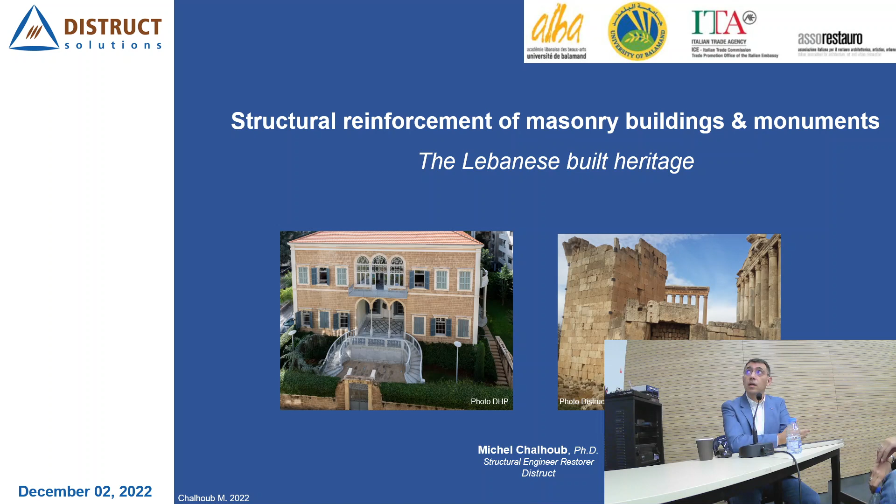As we all know, with more than 5,000 years of history, Lebanon is very rich in terms of built heritage, and most of this heritage is made up of masonry. So there is a need to retrofit, to reinforce, to maintain, and to restore this built heritage. In fact, the subject of masonry is very wide, and I will focus on the Lebanese built heritage, especially the Beiruti houses, because it needs more time to cover the whole subject.

First, I will talk about the concept of structural restoring of built heritage. Then I will move to the milestones of structural retrofitting, and I will focus a bit on the structural analysis of built heritage. We will see some proposals for reinforcement, and I will talk finally about monitoring.

So I chose to talk about the medicine of built heritage strengthening. Why? Because every built heritage, every historic building, is very complex in terms of history, phasing of construction, building materials, techniques of construction, aging, and so on - heterogeneity of multiple parameters. So we really need to use protocols similar to those of doctors to deal with our built heritage. The issue is that our patient also needs some geriatric medicine.

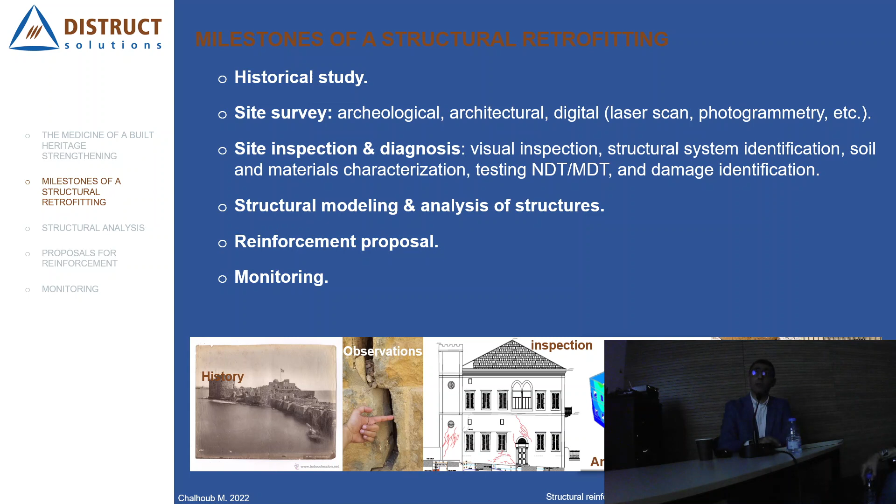This is a case study that we conducted on the Sidon Sea Castle, where we found some documents dating from 1871 and some of Kalayan.

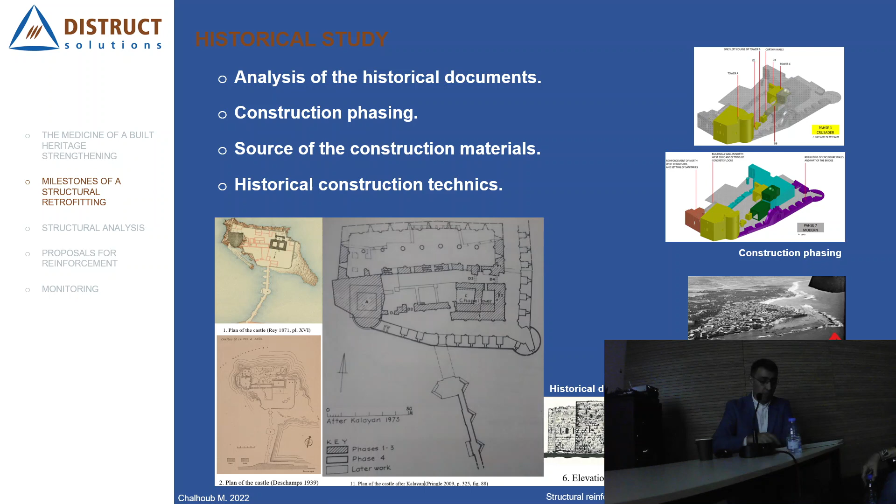We could prepare the construction phasing of this castle based on these documents. We also found that there is, for example, a sandstone quarry not far from the castle used to produce the sandstone materials.

Here we move to the site survey, and I'm showing two principal tools, which are photogrammetry and laser scan. I chose these two, in addition to archaeological survey and traditional architecture survey, because these two tools are very useful in monitoring.

We can compare the actual state of the building or monument, and after 2 years we will come back and do the same, comparing if there are modifications in terms of displacement or movement in this monument.

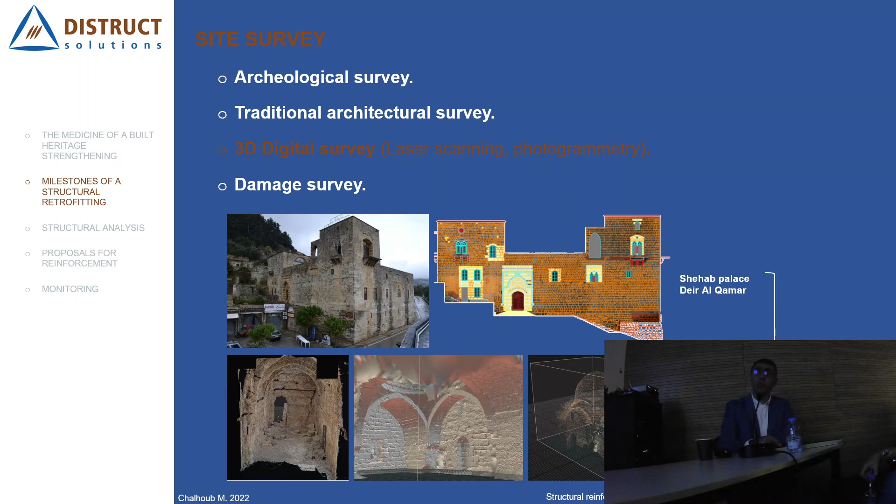Here I move to the site survey, and first of all we have to make a damage mapping. It means we have to put on paper, on photos, the cracks and the decays, based on some principles provided by ICOMOS or UNESCO.

We move now to the inspection and diagnosis. First we will start with the foundations. In fact, the system of foundation of Beiruti houses especially is like a foundation wall or arches, as shown in the photo to the bottom right.

In addition to the soil investigation that we all know for contemporary buildings, we have to do some pits to discover the typology of the foundation and if there is any crack, like for example the photo to the bottom left.

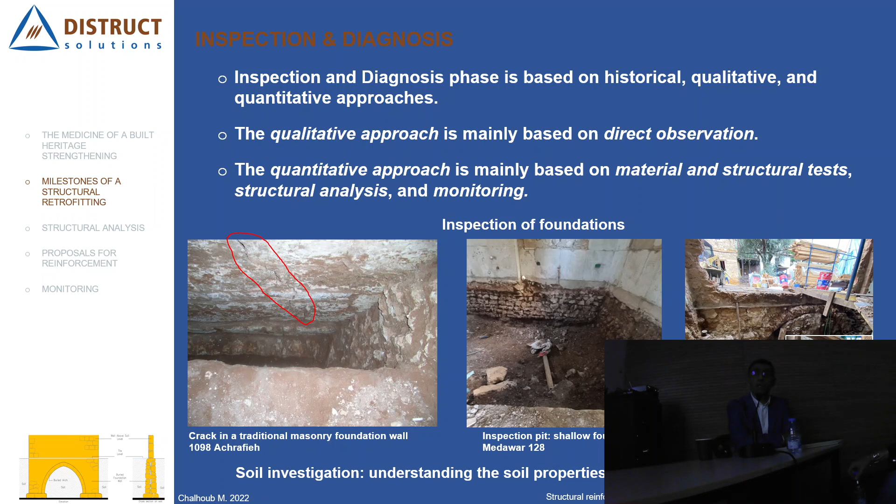In some cases, like here, it's an ongoing project, we discovered that there is heterogeneity in terms of depth of foundations and typology of foundations. So this is something that makes it a bit difficult to treat built heritage, unlike contemporary buildings.

We move, for example, to the inspection, with examples from Beiruti houses or historic buildings. We did some inspection on the walls to see about the texture, and we discovered, for example, rubble walls from the inside, meaning very poor mechanical properties for the bearing walls.

Here to the right, the system of slabs, like a wooden slab and the planks. We need to check every single detail, because the connection between walls and slabs is really weak in the built heritage of Beirut.

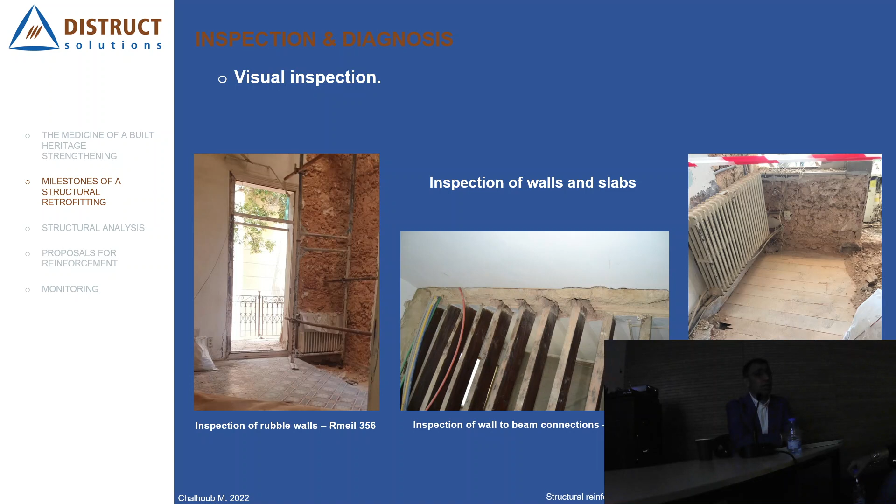Here we move to another example, a church, a very well known church in north of Lebanon, where we can see by our eyes a very big crack on the elevations, like in the bottom to the right. We can also see a settlement of the pier and a sliding of the soil. All of these parameters give us a clear vision about what is happening in this monument or building.

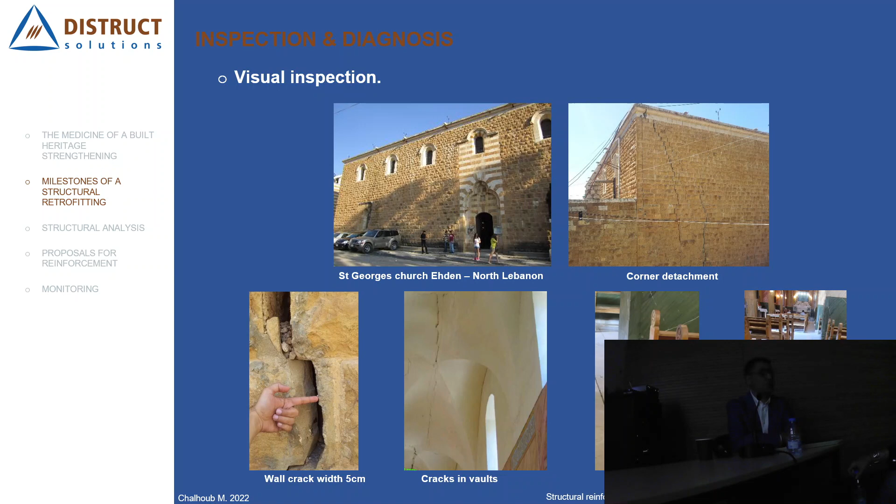So we can build on this to move to other steps, like testing NDTs or MDTs. NDTs mean non-destructive testing or non-invasive testing, or minor destructive testing. I will move now to the second step of inspection and diagnosis, which is the testing.

I will focus a bit on some useful testing for seismic calculation or retrofitting in built heritage. We all know the georadar and the boroscopy, but we will focus on the sonic and dynamic tests, and also present the double flatjack test, which is very useful in masonry structures.

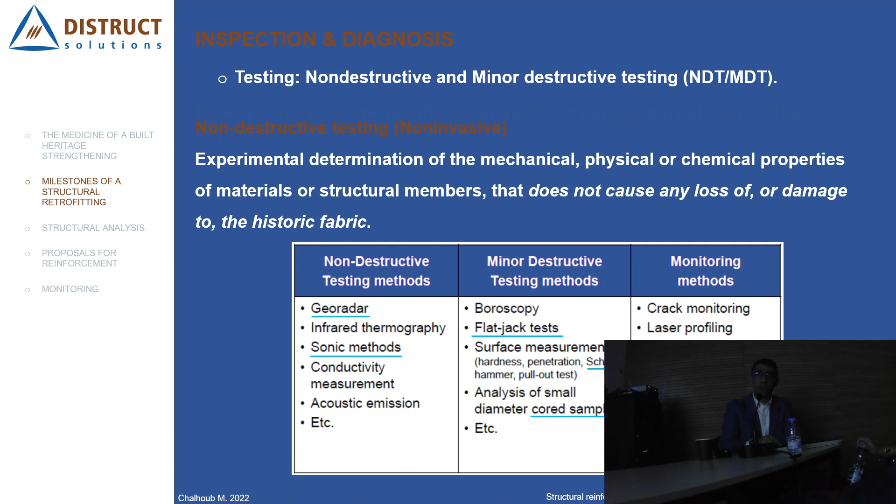Here's an example of dynamic identification, the experimental dynamic identification. I know many engineers make modal analysis on numerical commercial software. But to do it right, we have to check if our numerical or digital model is really representative. For this reason, we have to make what we call the experimental dynamic identification. It means knowing how our building is vibrating under normal or forced vibration.

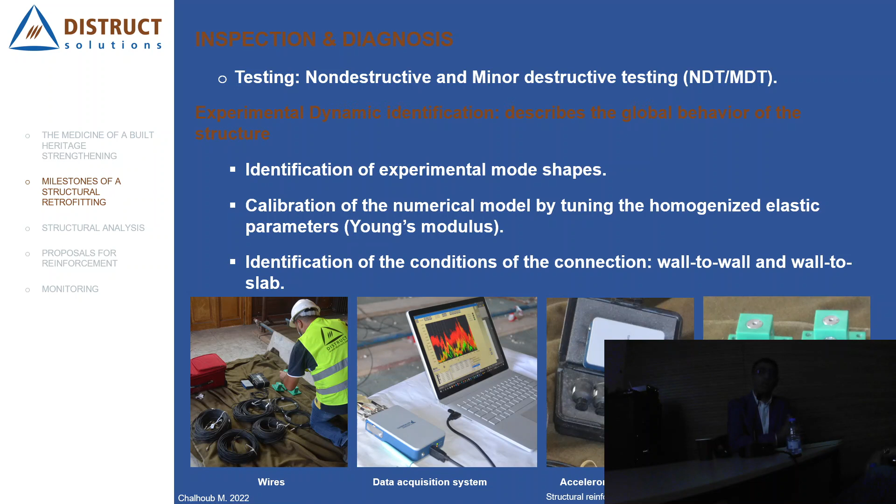Here we can see the tools needed: some wires, a data acquisition system, and the accelerometers. They are the key of the dynamic testing, along with some connectors. I will show you some testing we have done here in Beirut.

We can see the signal, and to the bottom left, the numerical model. It is a nonlinear numerical model, but for the modal analysis we are in the elastic phase. We can see the mode shape, meaning how the walls are moving according to an earthquake. To the right is the experimental output, a post-processing that demonstrates the mode shapes are similar between experimental and numerical.

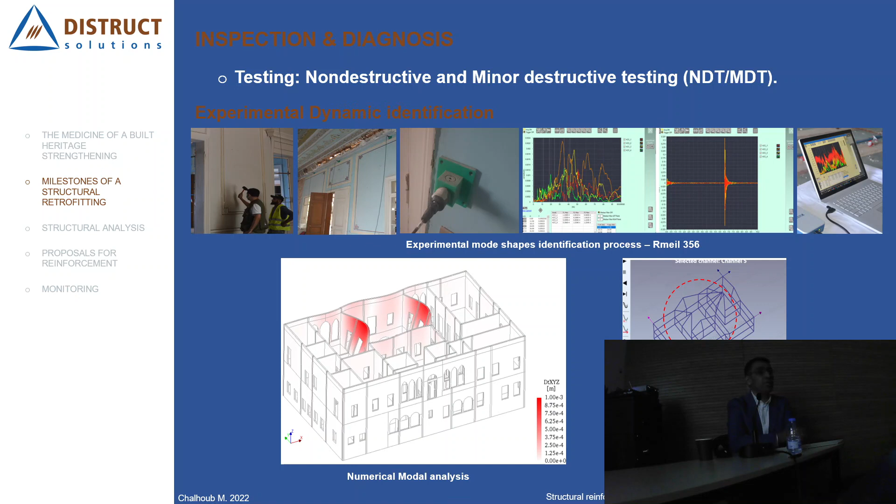We need this also to calibrate our numerical model. It means making sense of our numerical model to get good results.

Now I will move to the sonic or ultrasonic test. We need this to know about the quality of our walls. The same system as the dynamic testing is used here, but we add a hammer that we can see in the middle left. To the right we can notice an output for the sonic or ultrasonic testing.

The one in the middle shows a variation in colors, meaning that inside our wall we have some voids, and the one to the right is homogeneous after injection. We can see the injection process. So this is a good tool to know about the quality of our masonry walls.

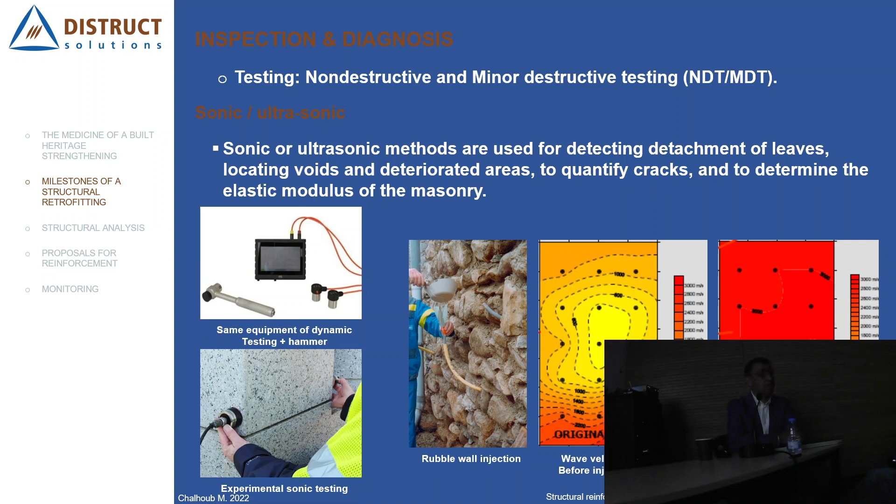I will move now to the double flatjack test, because this one is really very interesting. From this we can see on the right the stress-strain curve. It means we are learning about the deformation and the stress of our wall.

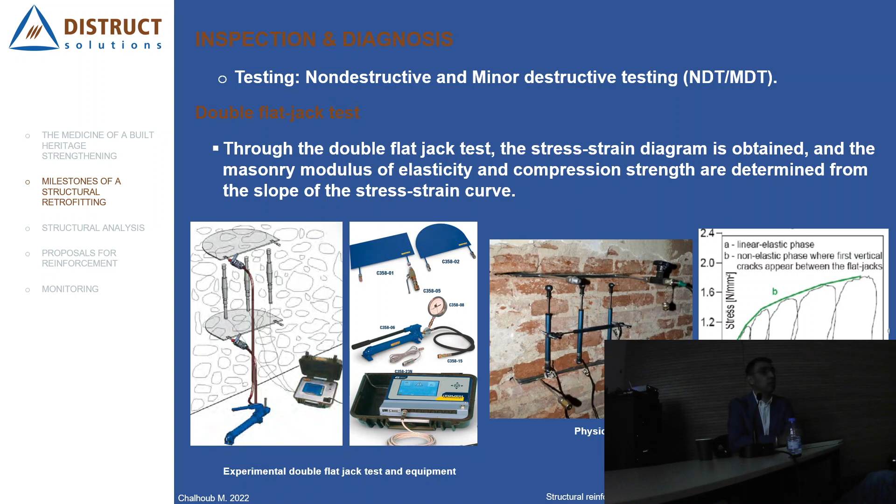This is very useful because, as you know, masonry is made up of stone blocks or brick blocks and the mortar joint, so we need a homogenized behavior. We need to know how our wall will deform according to stresses or lateral forces like earthquake or blast. This is very useful to introduce the results into our modeling, our numerical model, to have representative results.

I'll move now to the structural analysis of our building. To know about the structural analysis, we need to know about the masonry itself. As you can see here, many types of masonry are present, from the regular ones on the left, to rubble walls, and to the double leaf wall or single leaf wall.

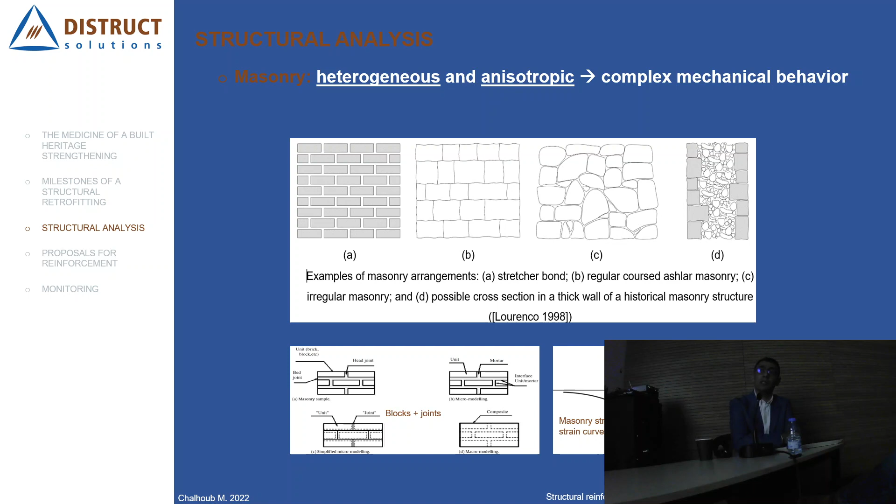This makes it a bit complicated to treat in terms of stress and strain and the behavior of our masonry wall. For the engineers among us, the photo at the bottom right is the stress-strain curve we use to simulate a masonry wall. The right part is the tension, and we can see a fragile behavior of our masonry. At the bottom is the compression part, and you can see it's like a parabolic shape with a softening after this.

I told you the masonry is really complicated. Why? Because if we look at this photo, we can see multiple behaviors of our masonry wall: the in-plane behavior, meaning the crack will occur inside our wall, and the out-of-plane or overturning or rocking behavior that we can see on the right. Till now, this kind of behavior is a subject of research.

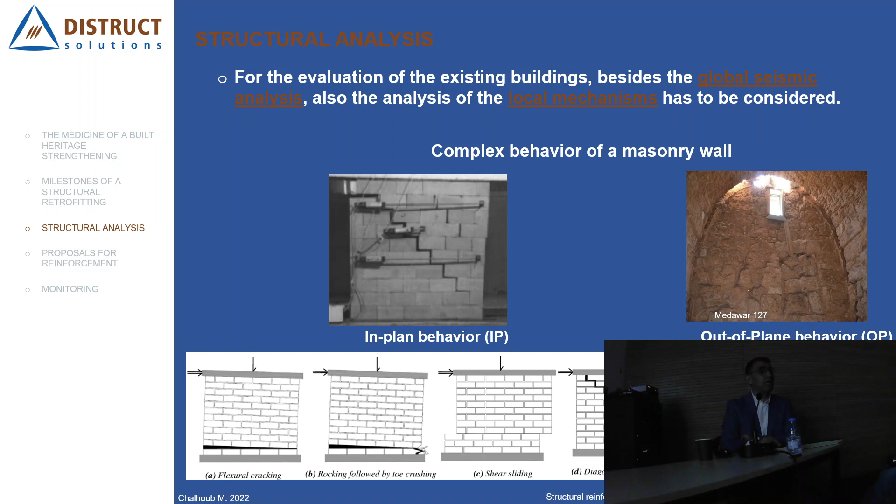If we look at the bottom left, we can see for example a normal force which comes from gravity, and a sliding force which can emerge from earthquake or blast. Our wall will behave differently from case to case. Because of this normal stress on the wall, our wall can slide, can rock, or can even crack at 45 degrees. So we need to know all about this so we can correctly simulate our wall behavior in masonry.

When I talk about non-linear, it means that our material is plastified, so the deformation of our building is irreversible. It will come to a certain stage that it cannot come back to the initial stage. So I'm going to present some case studies that we are also conducting.

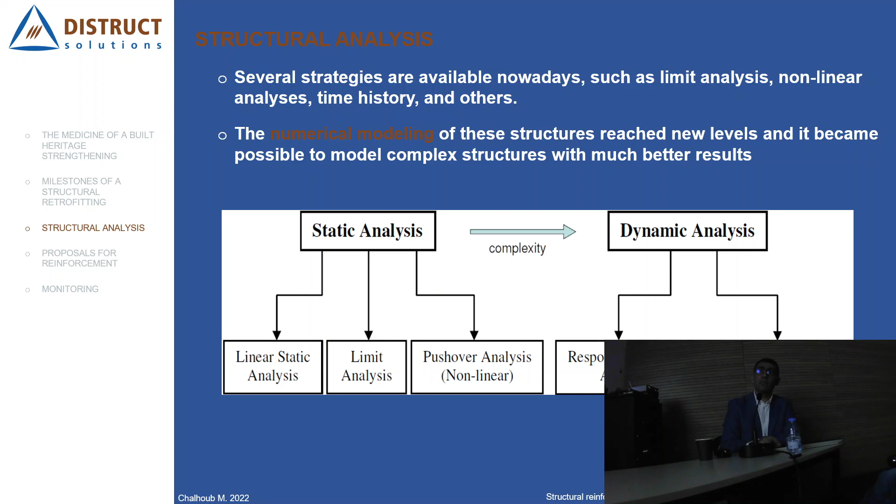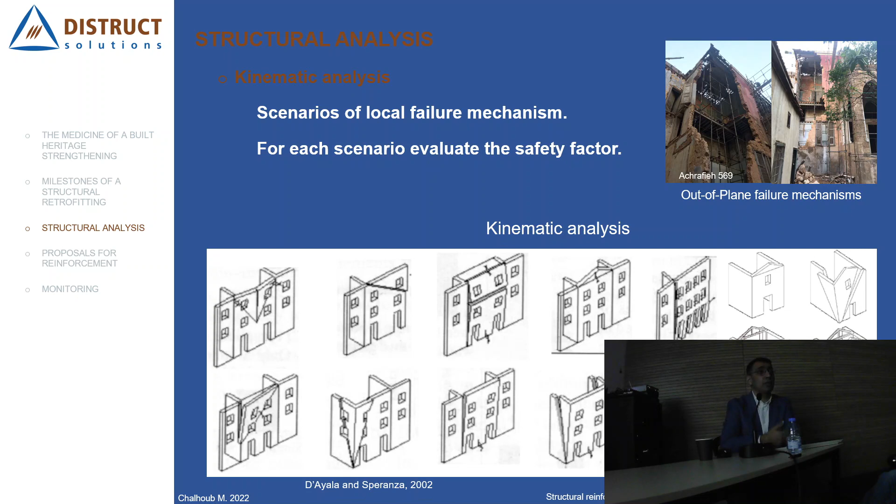Even the Eurocode, the new Eurocode, is now based on the Italian code, the NTC and the circular of the Italian code. So we consider a scenario for collapse and we check the safety factor. If the safety factor is not very big, our scenario is possible to happen. If not, we are a bit safe. I'm trying to simplify a bit the approach of this study.

Now I will move to the finite element approach. It is really a very advanced approach that we are now trying to apply on the masonry building, and it gives very good results. I will show you some of them.

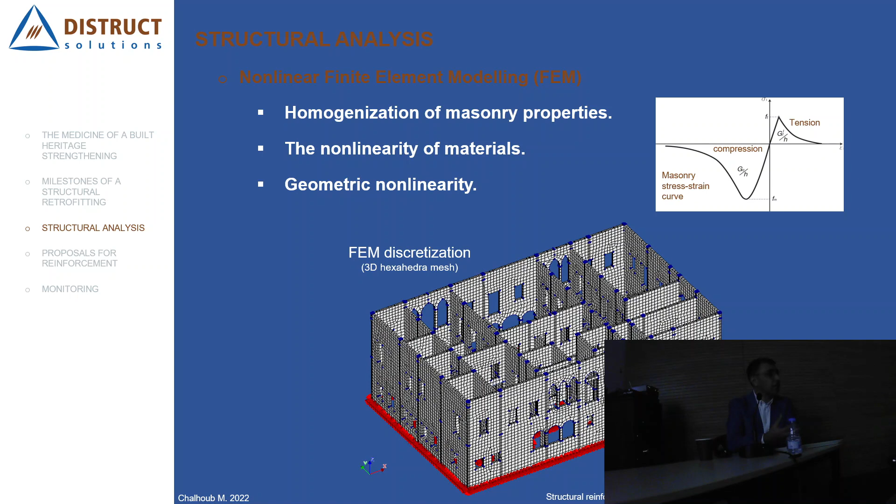For this reason, we have to consider the nonlinearity of materials and the geometric nonlinearity. I think this is a bit boring for architects and common people, but for engineers, I hope you understand the difference between modeling contemporary or historic buildings.

This is an ongoing project. I will show you some results from these simulations. The characteristics of the building are there. The mesh size is about 30 centimeters, meaning the size of each small part in these walls is about 30 centimeters. When we refine our mesh, we get more precise information, so we are forced to do a small mesh. It is a time-consuming process, but it is very useful in terms of results.

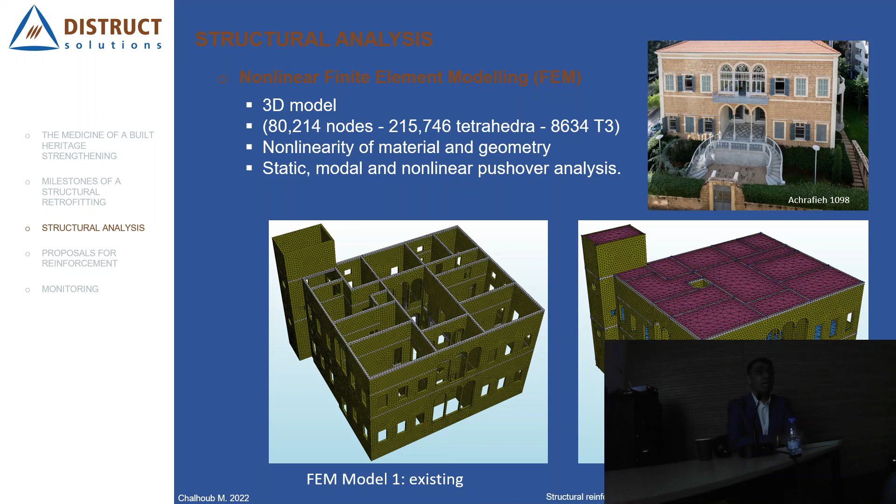To assess this building, we did two models: one of the actual state of this building, and the second one, to the right, reinforced. What is the difference between the actual state and the reinforced one? Some small details can enhance the behavior of our building, like good connection between slabs and walls, which is not the case in Beiruti houses, and can improve a lot the behavior of the building against seismic effect.

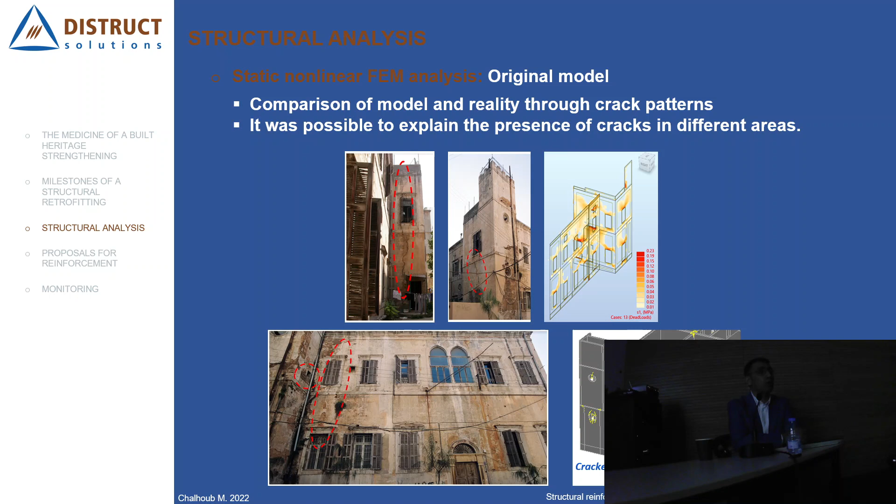So in the actual state of our building, we can explain what would be the capacity of our building. And when we talk about capacity, in general, we talk about the horizontal acceleration that our building can handle. Because in Lebanon, for example, the peak ground acceleration in many places is between 0.25 G to 0.3 G.

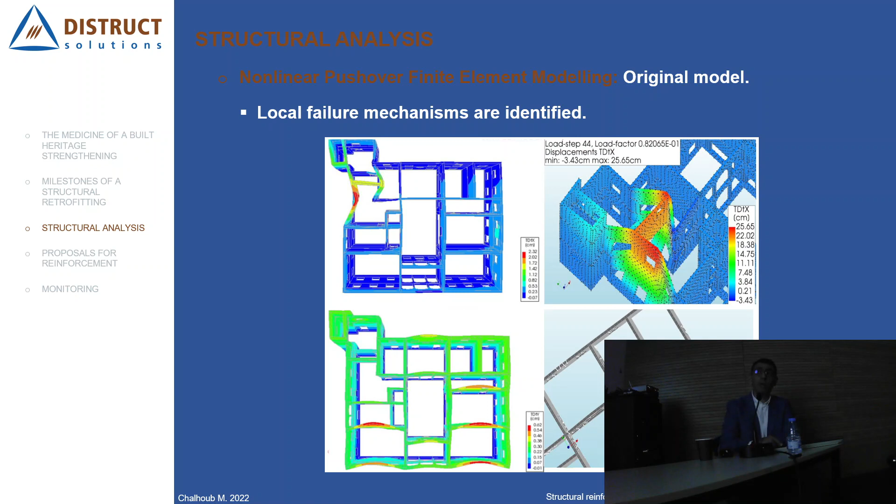And this is what we call the box-like behavior. We need our structure to act like a box, like a global mode.

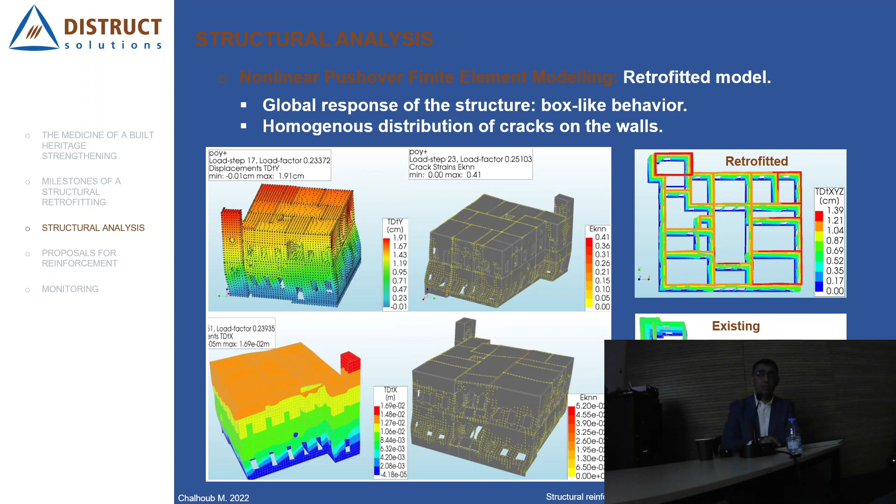So here it's a bit of a comparison between the original model, when we have irregular displacement and force concentration, and the retrofitted model, when we have the box-like behavior and better force distribution.

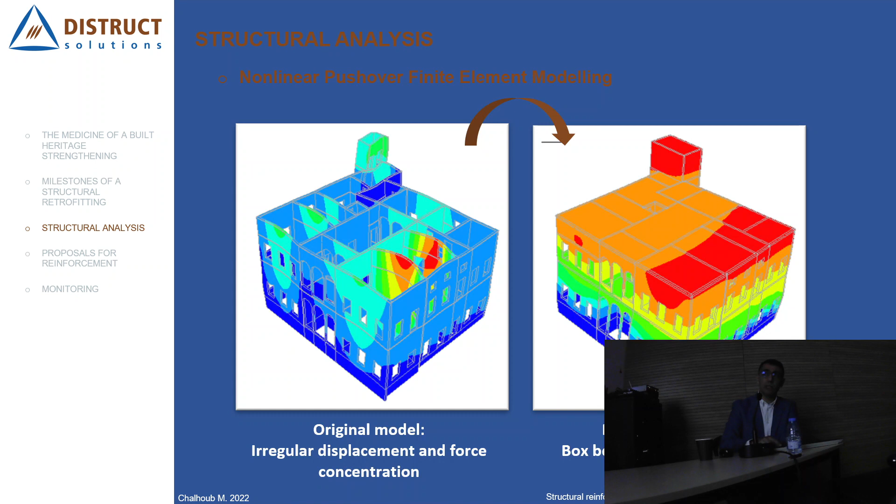Here also we continue, and this slide is dedicated also for the engineers, how we can know about the capacity of our building. We select some nodes on some points on the building, usually on the top, and we check the displacement versus the acceleration, or the displacement versus the base shear.

The base shear is the force coming from the earthquake that will try to cut the base of the building. Here, for example, on this output, we can see that our building, in its actual state, is handling 0.08 G, and when it comes to retrofitting, it will be upgraded to 0.2 G.

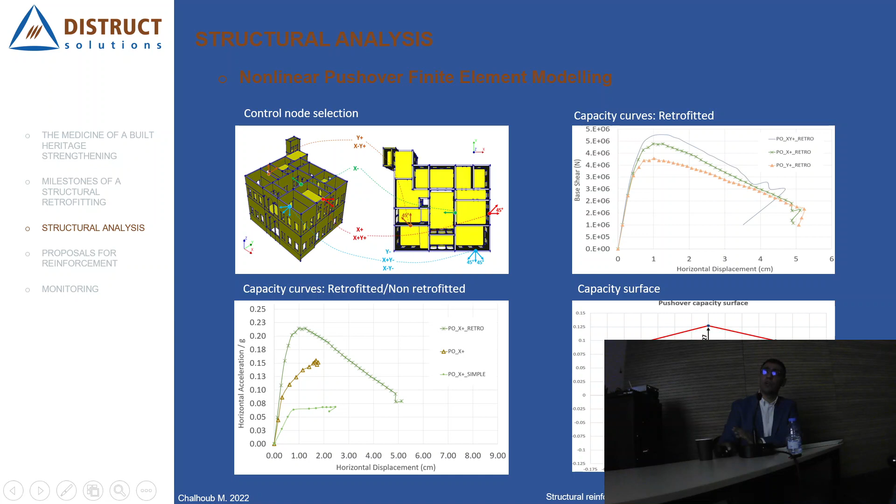And here it is the surface resistance of our building according to the direction of the earthquake, like for example, in the X direction, in the 45 degrees, and the Y direction.

And to complete with the engineers, this is the verification according to the Eurocode and the Italian code, where we compare our output to the response spectrum curve.

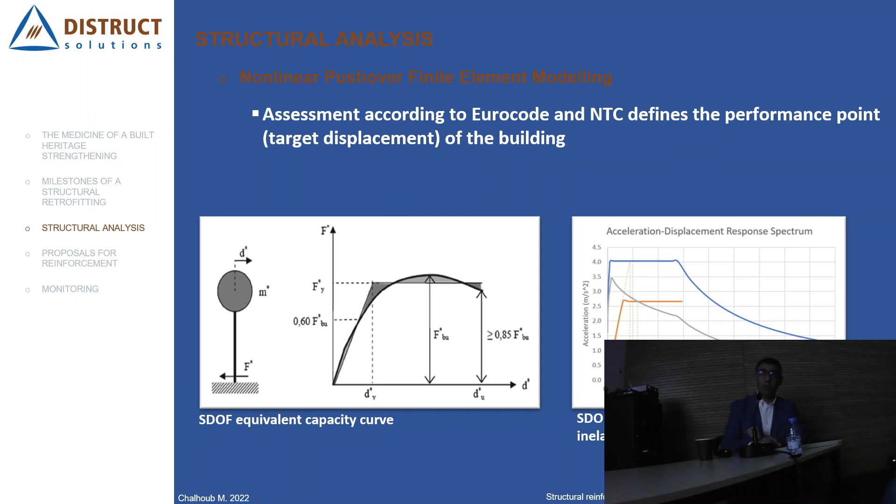So here we can evaluate the capacity of our building and try to tell the client, if you need to make a retrofitted building against earthquake, we need to do so. We need to intervene on the walls or on the slabs and so on. So this is a tool for decision that we can use to apply on most of our Beiruti heritage, because really it is not so complicated, but it is not so known to date among the engineering community.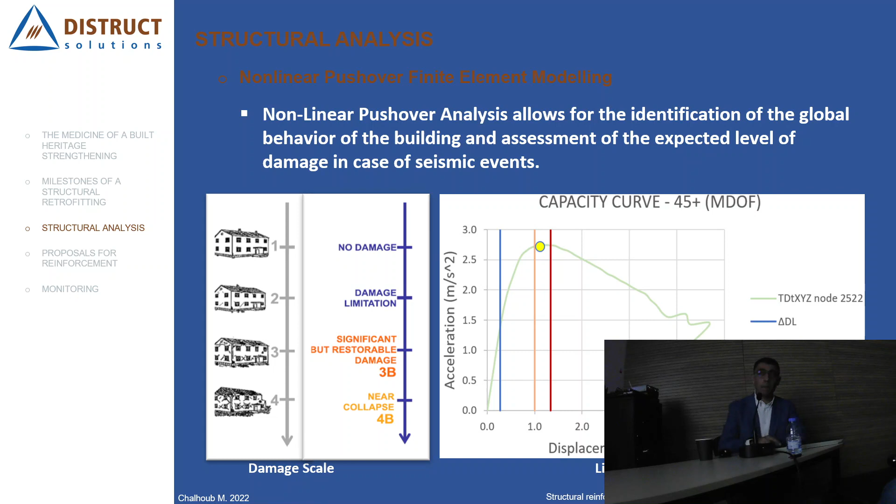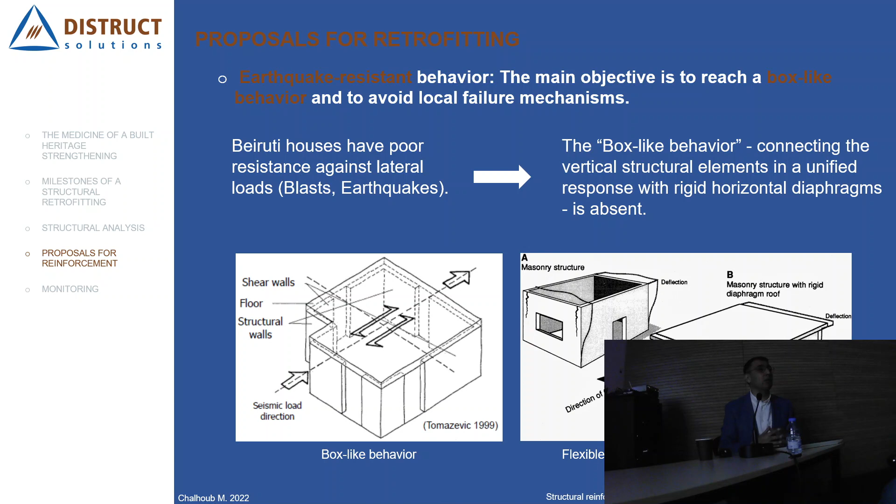I will move now for the proposals, and as I told you, we need to have this box-like behavior. So we need to unify all the behavior of our building, so all the bearing walls can participate in resisting our earthquake or our blast. So, I will discuss a bit with you a problem, like a case study.

At the end, we will come to a solution that will make the original structure, our original built heritage, disappear. So the authenticity of our building is lost, and the use of non-compatible material is also here.

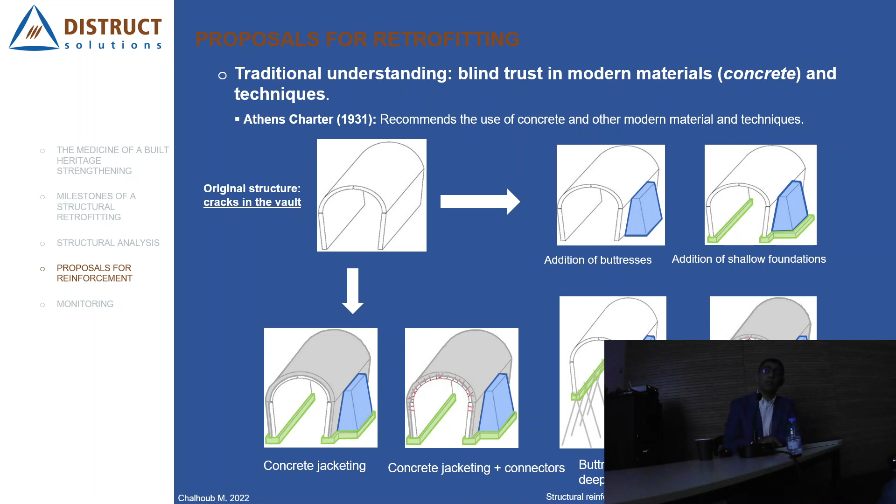Unfortunately here in Lebanon, I've seen multiple case studies of retrofitting of historic buildings going the wrong way. So we need to change our mindset and go the right way, not the wrong way.

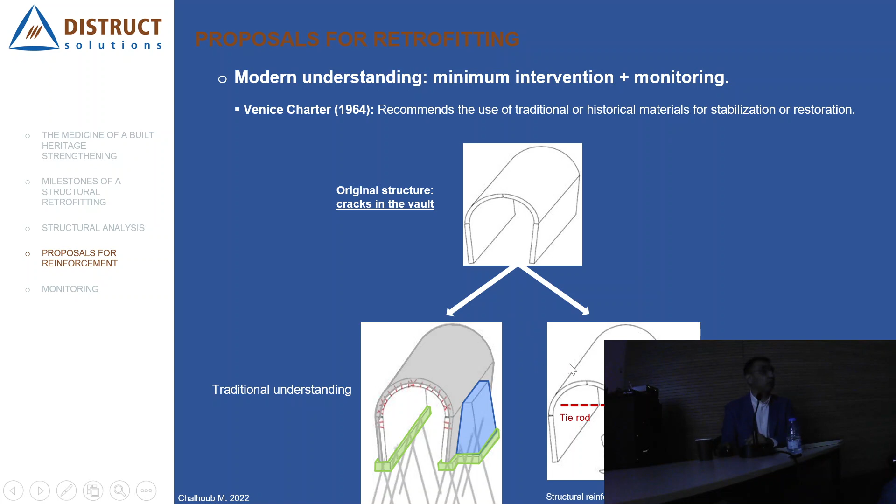So what do we do to strengthen our built heritage? First, we have to intervene to improve the wall-to-floor connection, meaning we need a good connection between the walls and the slab.

Second, we need to improve the behavior of our arches and vaults, which are rare in Beiruti heritage. We need to introduce retrofitting for floor deformability, because most of our floors are made up of timber floors or jack arch floors.

Then we need to intervene on the roof structure, because the wall of the roof structure is acting like a cantilever—it is not well connected to the attic. And we need to improve the quality of our masonry walls.

Here we can talk—and my Italian colleague Paolo will talk about the fiber net. We need to improve the quality of our poor masonry walls, because our built heritage in Beirut has poor rubble sandstone walls. And at the end, we need to improve the connection between non-structural elements.

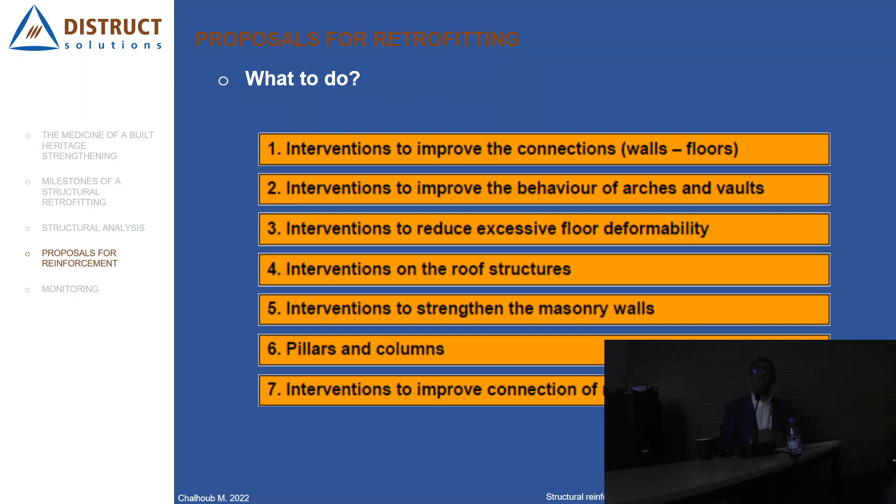But first, we need to know about the failure mechanism so we can decide what to do. All of these photos are coming from the Beirut blast. We can notice three different modes of damage or failure mechanism.

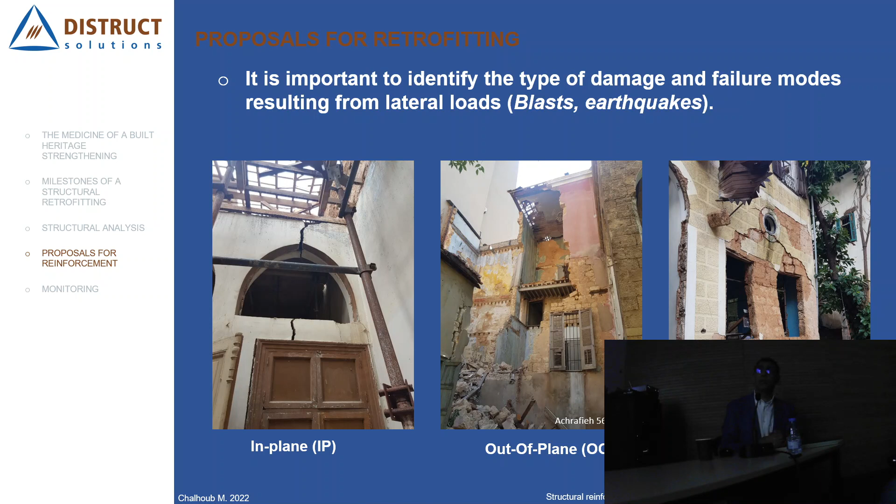The first, to the left, is the in-plane failure, where cracks appear within the plane of the wall. In the second photo, it is the out-of-plane failure mechanism. So with in-plane failure, the wall is still standing, but with out-of-plane failure, there is a local collapse. Sometimes we have this hybrid damage, combining in-plane and out-of-plane failure mechanisms.

All of these photos are from Beirut, and there is a lot of work to do. Here we also count on the intervention of the Italians and other foreign experts, because they have the material to supply, and they can assist us with calculations and approaches for retrofitting.

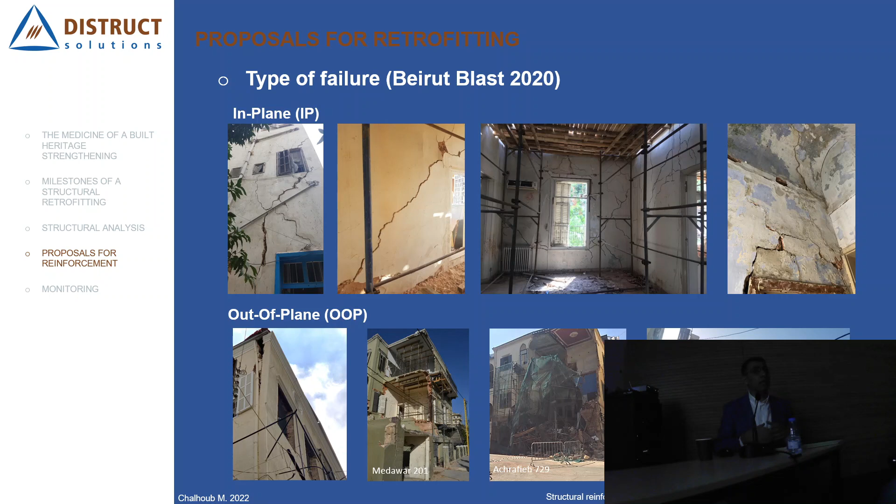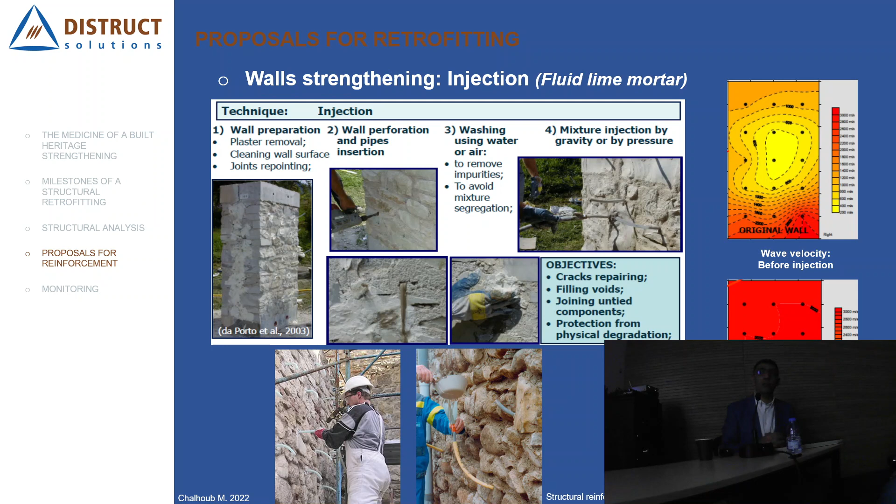So we proceed with this very simple method of making holes in the wall and injecting lime mortar, either by gravity or by low pressure, like less than 0.5 bar, to fill all the voids in the wall.

The second method, the most commonly applied here in Beirut, is structural plastering. Here I'm showing a facade, an elevation, where the mesh—a fiber-reinforced mesh, either glass or basalt reinforced fabric—is applied. We put reinforcement on the wall from both sides, and our wall becomes like a sandwich wall, similar to a reinforced concrete wall, having reinforcement from both sides but with better materials. These two sides of the wall are connected with what we call connectors.

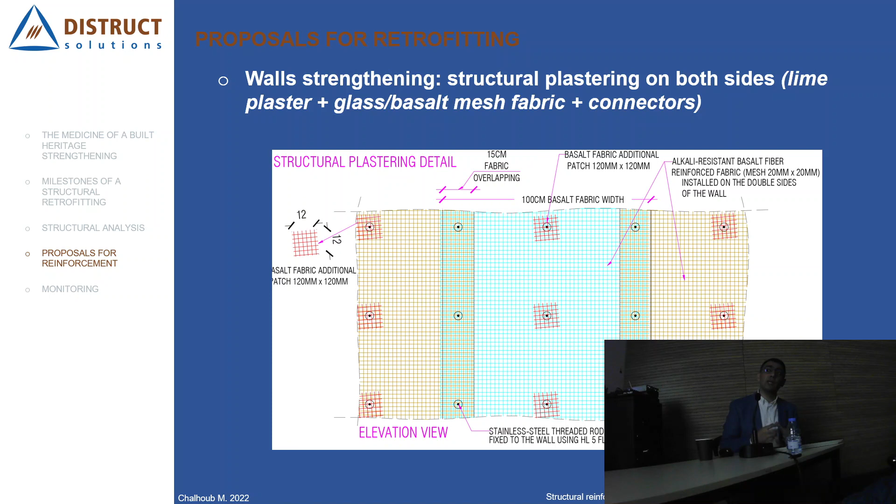Here in Lebanon I can see some ongoing projects of structural reinforcement. We put the reinforcement on the walls, then we make the connection—to the bottom right, we can see the connectors, the customized ones. Italian suppliers, for example, have their own system, but it's similar to this.

Just by doing this, we can enhance the out-of-plane and in-plane behavior of our building to reach maybe 3, 4, or 5 times the initial capacity, and this way we are sure that after an earthquake our building will still resist such actions.

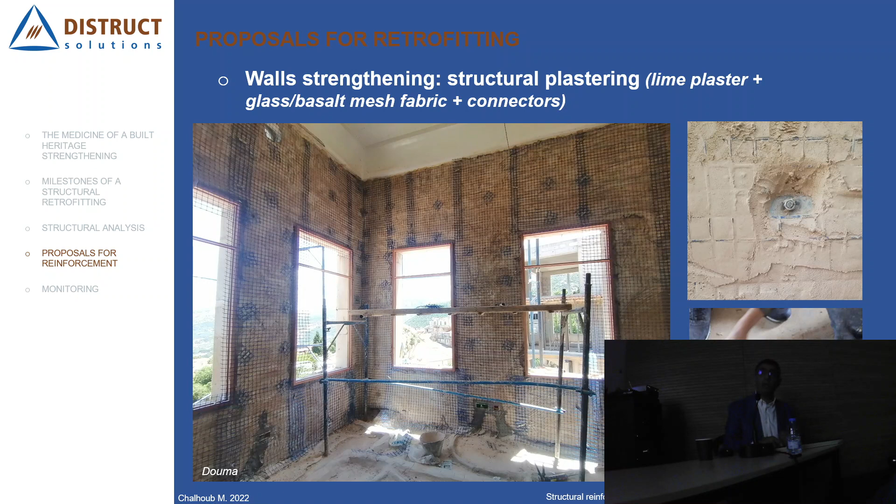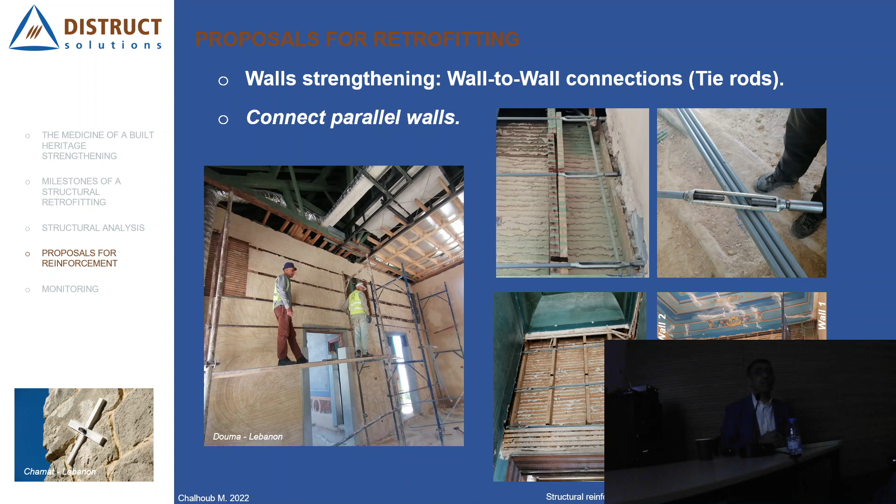Now I'm moving to a second tool, which is to connect the walls between themselves. I can show a case study in Douma, similar to our Beiruti house, where we are connecting walls in a Baghdadi wall. You can see the steel connectors going from the wall to the right and the wall to the left, included inside the Baghdadi. Then the Baghdadi is closed, and we can do plastering like usual. This is a very minimalistic intervention that will enhance the capacity of our building.

I move now to the wall-to-wall connection, the T connection. When we have two intersecting walls and a corner one, we put these dowels, usually fiber, basalt, or stainless steel. After that we put the structural mesh. Here we have the dowels, the structural mesh, and the connectors, which will make a very rigid connection for the wall.

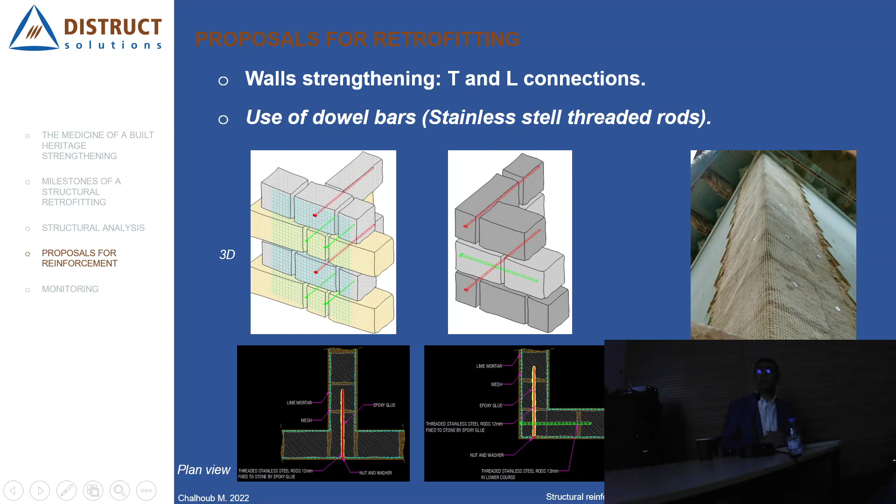Here it is a recent application from the Beirut blast. The basic issue, if our wall is cracked, is the stitching. The stitching is a very simple operation. We show here two different types of walls, a plastered wall and a non-plastered wall, where we introduce the stitches inside the bedding joint, making a connection between the two separated parts of the wall. This process needs to be followed by an injection of our crack, which we can see filled with, for example, lime mortar.

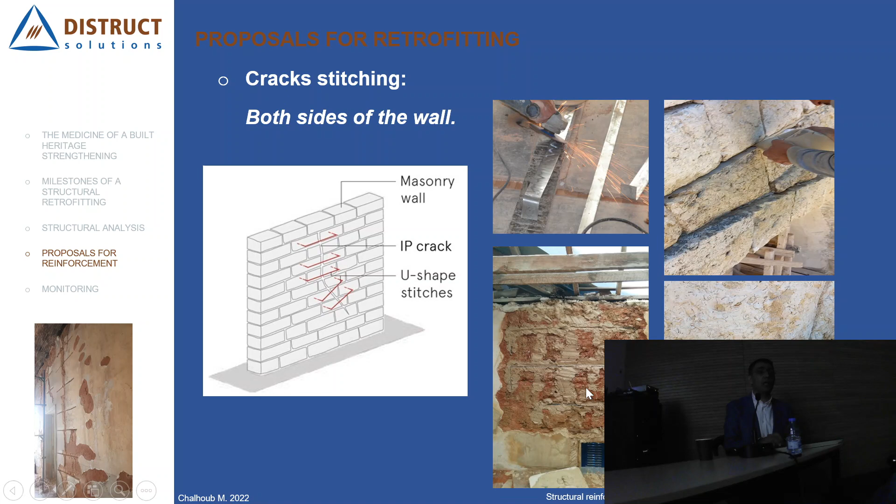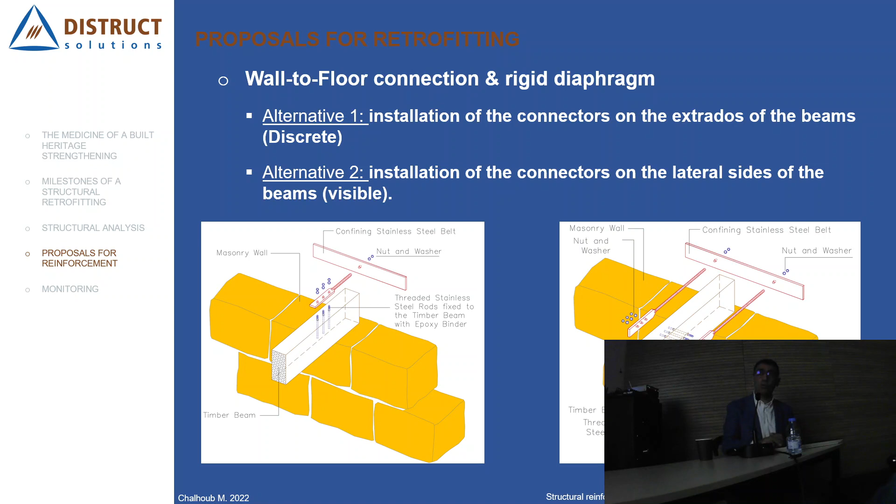To enhance our capacity between walls and slabs, we need to connect our beams to the outer side of the wall by doing a confining belt. For the inner walls we can duplicate our planks, giving more stiffness to our slab or timber floor, and we put some braces. We connect all this system to the existing wall, and this is what we call wall to floor connection.

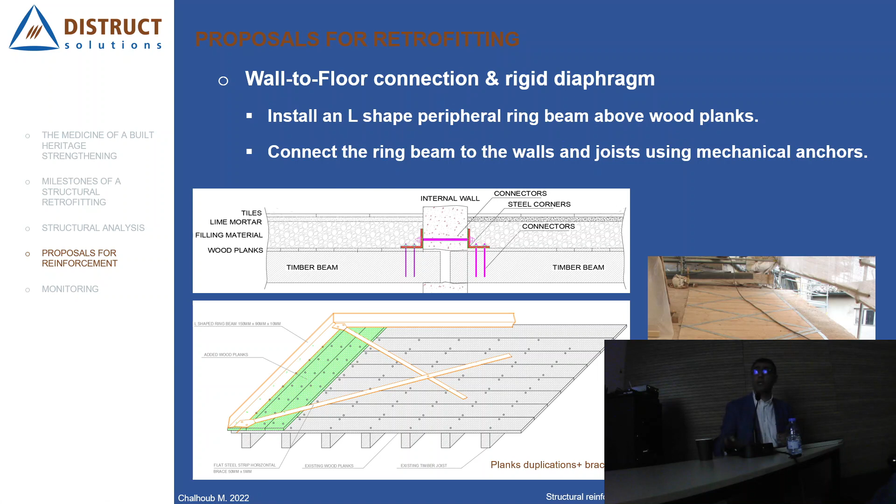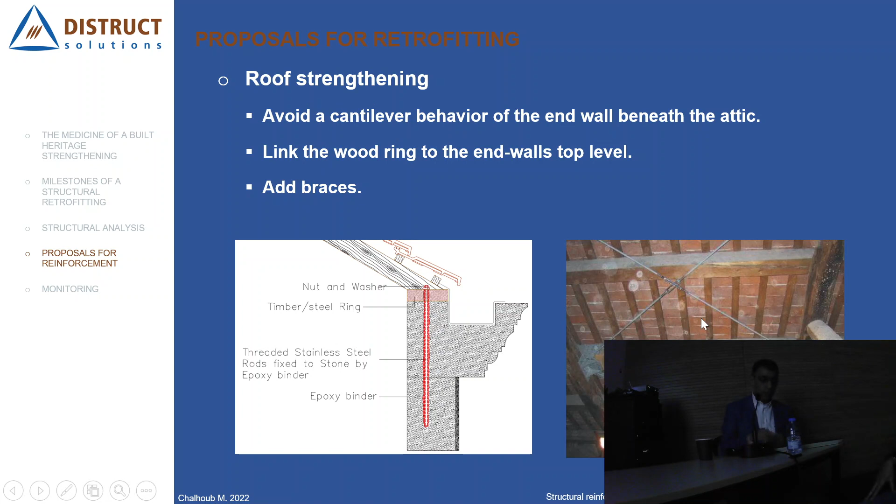I will show an example that also enhances the capacity of our last floor walls. We connect the sablière, or tie beam, usually made of timber or wood, to the walls, so we don't have a cantilever mode deformation. We also need to reduce the torsional effect by introducing some braces, or croix de Saint-André.

Here I move to the treatment of foundations. This is an ongoing project, and the consultant is among us, and the contractor also, thanks to their everyday coordination. I don't like to do so, but in some cases we need to. We are introducing some enlargement in terms of concrete foundations, because we have shallow foundation and we are adding a floor on top of the building. So unfortunately we need to enlarge our foundation system, and you can see some photos of the process.

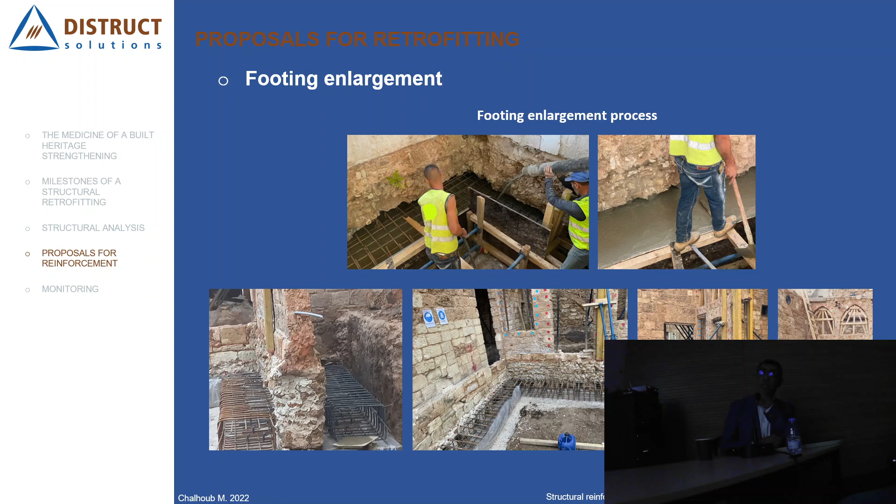In some cases we also need to underpin our walls. We can see the micropile system, introducing a good bearing capacity by friction of the soil.

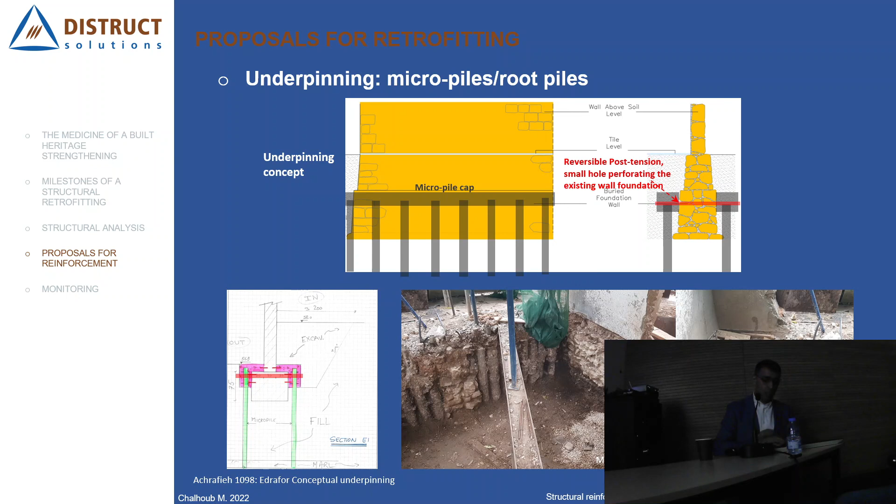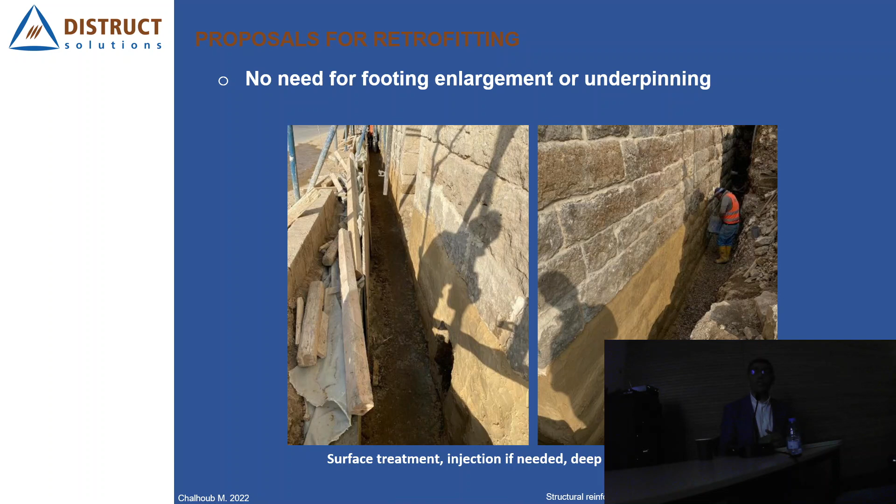In some cases, this is the best case scenario that I like to see: to do nothing on the foundation. If the soil is good and the foundation is good, we just treat the void, if there is some void in the foundations, and we plaster it, and that's it. We make a trench, we fill it with gravel to ensure drainage of the system, and we end it here. I would like to ask you, after this quantity of slides, what we can do here.

Do you still need to think about concrete jacketing? I think there is a lot of different, better solutions than doing concrete jacketing. So this is what not to do if possible. We really need a big effort from engineers and architects here in Lebanon not to do so.

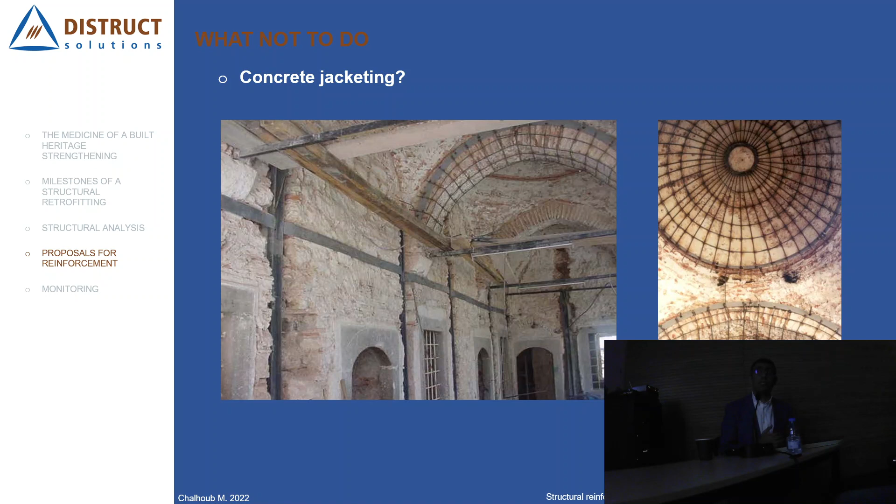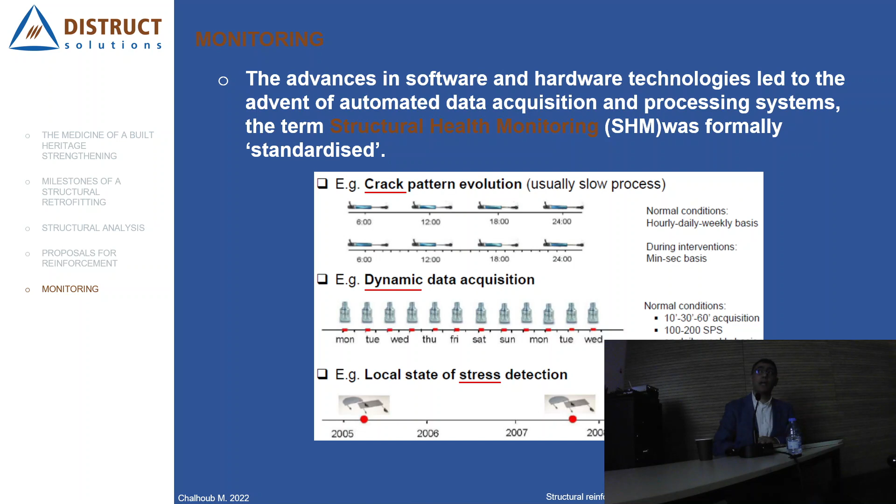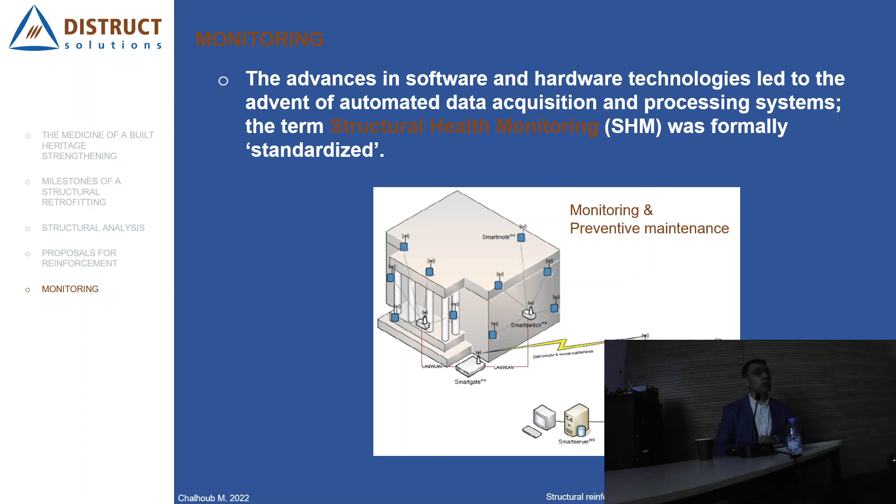Once the retrofitting is done, the doctor will tell his patient, please come back after a while and we will check up your health again, so we can do some monitoring of the structure in terms of crack or vibration acquisition data or stress detection. In the last decades we are talking about structural health monitoring. The last slide shows that remotely we can know what is happening in our building in terms of vibration, stress, or whatever, to give longevity to our historic building. Thank you for your presence.